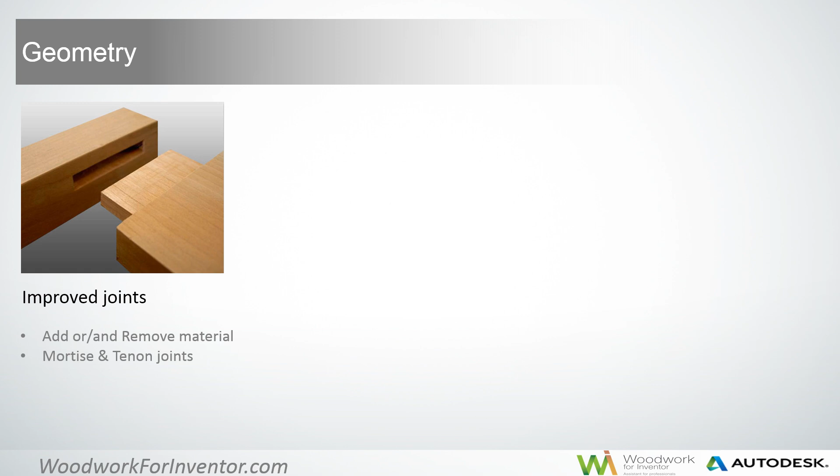So now Woodwork V5 makes you able to apply a selected type of joint to your design using the same simple way you used Woodwork before. Because now the system allows you not only to remove material but also to add material to the components, this makes you able to create joints like mortise and tenon, Chinese joints, finger joints and so on in quite a simple way.

Also, one of the new trends in design is the usage of folded plates. They may be used to cover several components, or maybe you want to just use a shared HPL layer, and so on.

Now we include such ability in Woodwork, so we have flat pattern mode supported. This means that you can unfold your folded part and apply texture direction or oversizes on the flat pattern. Also, if necessary, you may change the direction of texture in a similar way, and of course, you may control an oversize.

In many designs today, you may face sweep profiles made from solid wood, so in many cases you need to calculate the unbent length of such a profile. New Woodwork makes you able to do that. Also, in many cases you need to control oversize along each direction.

Okay, let's speak about wooden joints. As you see now, we have a sample model which contains 4 plates made from solid wood. Also, near the model we see the solid wood joint itself.

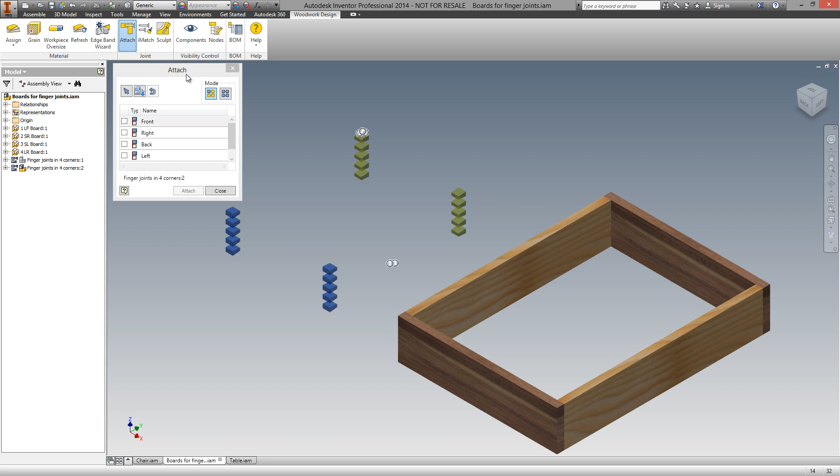Now, using the attach command, I'm able to set the right position for such joinery. It includes a similar command to the one you may see with hardware attachment. So I need to point on the front surface, on the right side, on the back, on the left side, and on the top.

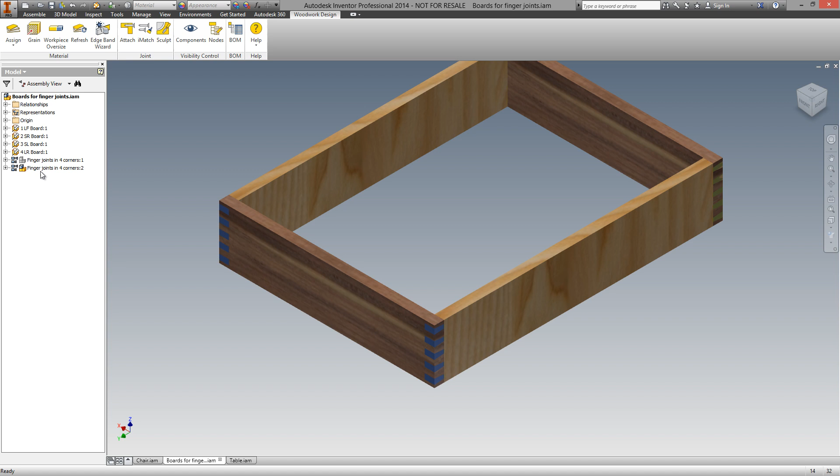Now, as you see, this joint is included in the model, but there is no joint till this moment. So all I need to do is go to the sculpt command and just run it. Now I may close it, disable visibility of this component, and as you see now we have a nice looking realistic joint here.

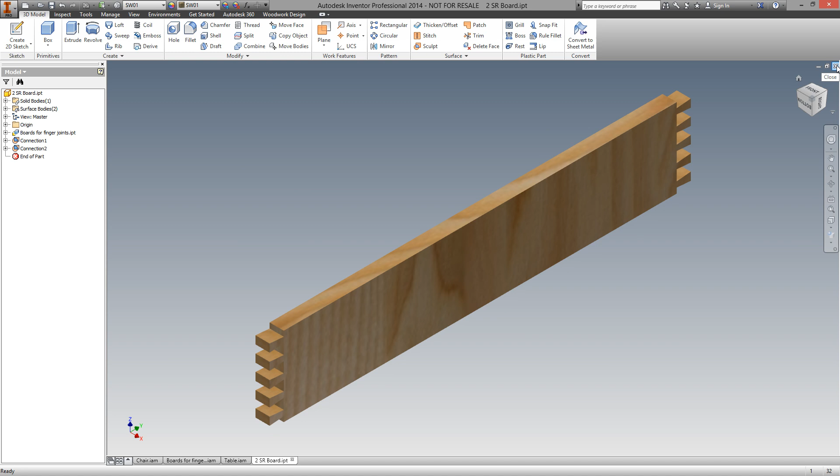You may be able to see the parts separately. As you see, we have material removed from one side and we have added material to another part. So, quite nice. Okay, and now let's see.

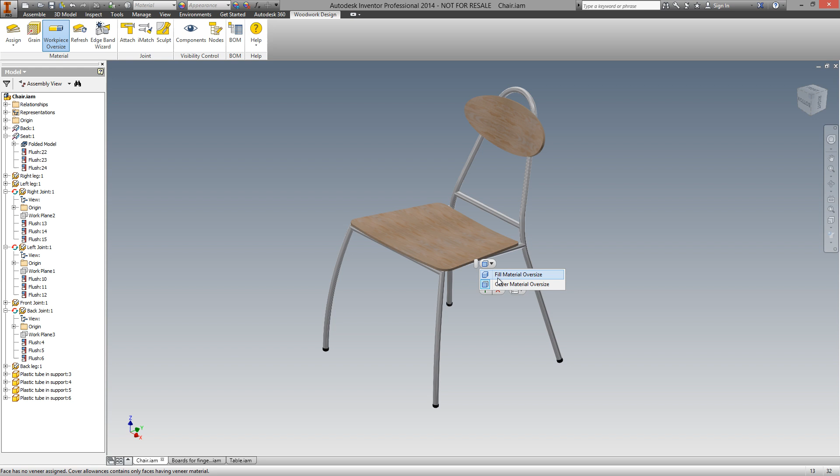Let's see how we can deal with a situation when we have some bent profiles, some folded plates, and so on, and we need to set appropriate dimension, appropriate texture orientation, and so on. So let's go there, and let's see - I need to set oversize for such a profile.

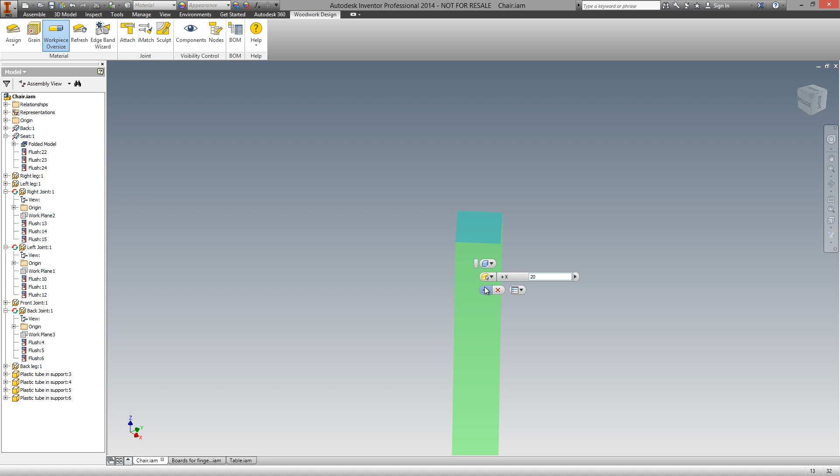The system automatically straightens this component, unbends it, and now you are able to set an oversize along each direction. So I will set a length oversize of 2 centimeters. This yellow shape represents the size of the additional oversize.

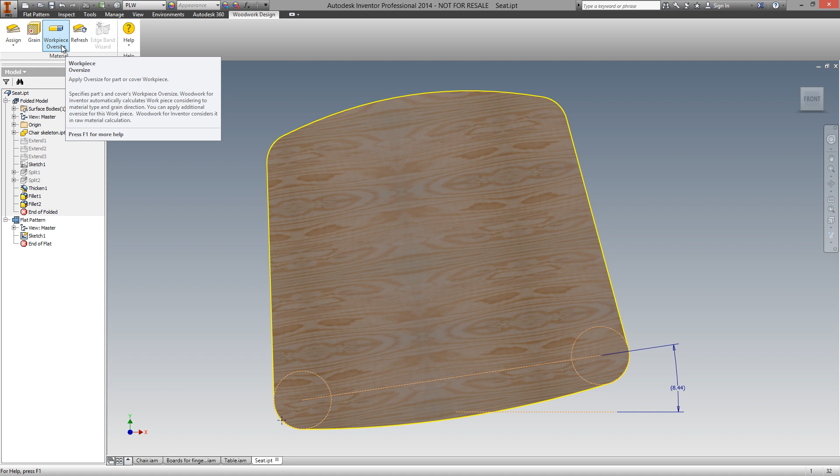Let's see what we may do with that part. This part is made in a sheet metal environment, which means that you may go into flat pattern state and set texture direction or oversize there. Because our part is rounded along the edges, we need to set some oversize to make sure that this part will be manufacturable, and set some oversize value. Okay, let's see how it will look after the oversize is set.

As you see, I added 1 centimeter along each of the sides.

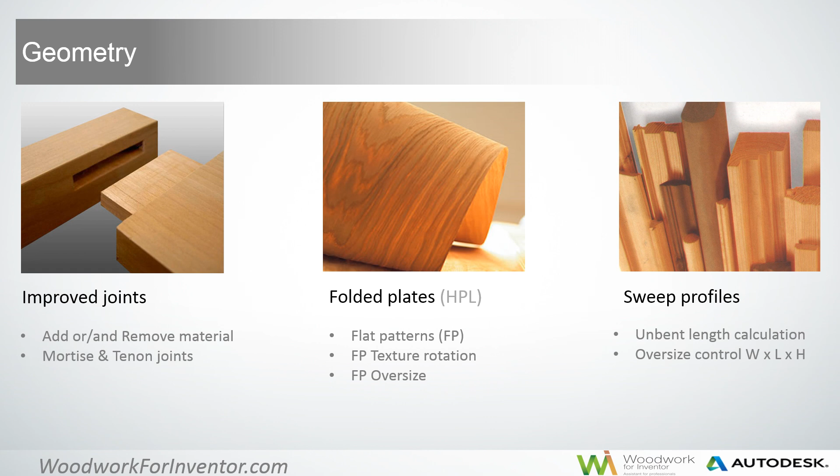Let's move to the next question, and now let's speak about material assignment. The new features allow you to separate cover layer from fill layer. This means you can independently rotate a texture direction, set an oversize, and create multi-layer boards very easily, especially if you create a laminated board in your workshop.

We also included several new types and features like paints or lacquers. We have separate sections for veneer, compensation film, HPL and so on. Because we're now working with a flexible material library, you can add a lot of materials there. There's a function that allows you to structurize materials in a way that's more comfortable for you, and we call that palettes. You can create your own palettes, including just a few materials needed for a given case.

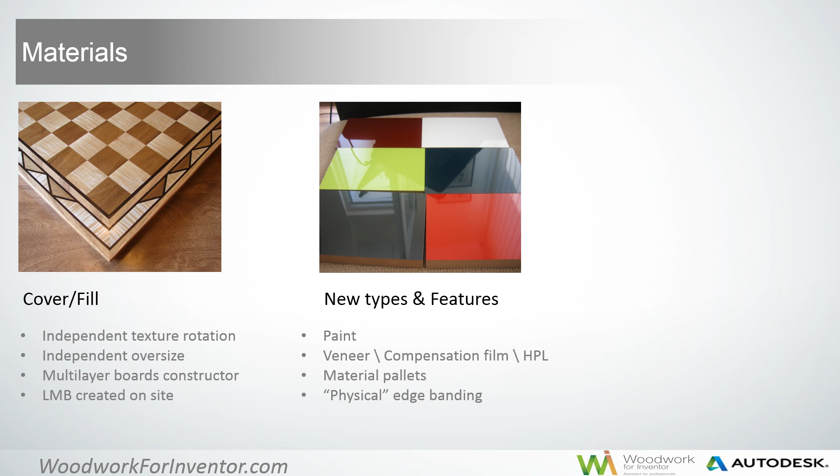Also, fulfilling the requirements of our customers, we included physical edge banding ability, meaning you can physically model edge banding in your modeling space. Speaking about materials, we made them Inventor native. This means they are photorealistic and shared with other Autodesk products like 3ds Max and Showcase. We also included an ability to rotate texture on the model, and we included physical properties like density, so you can calculate the weight of your model by setting the appropriate density value in the material.

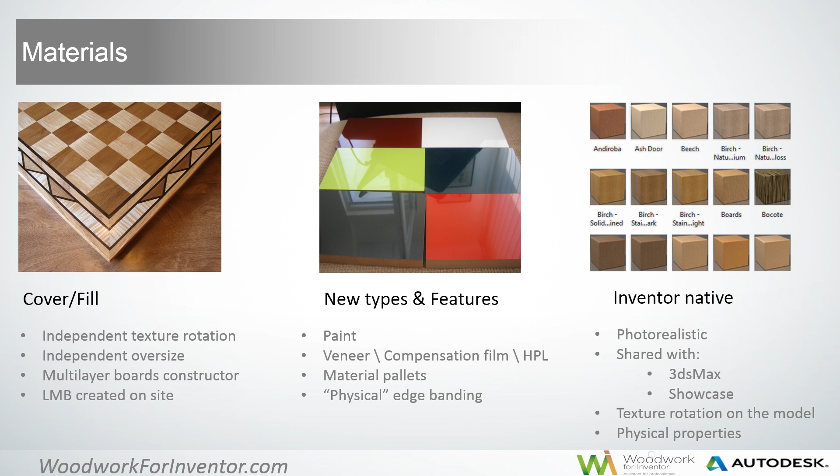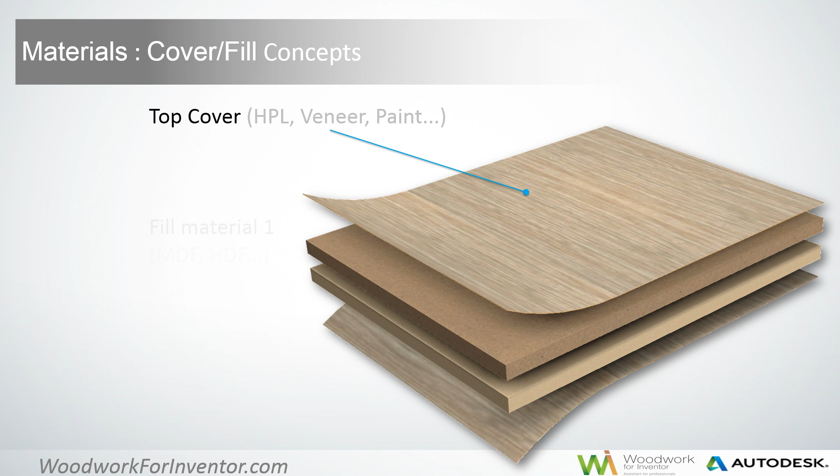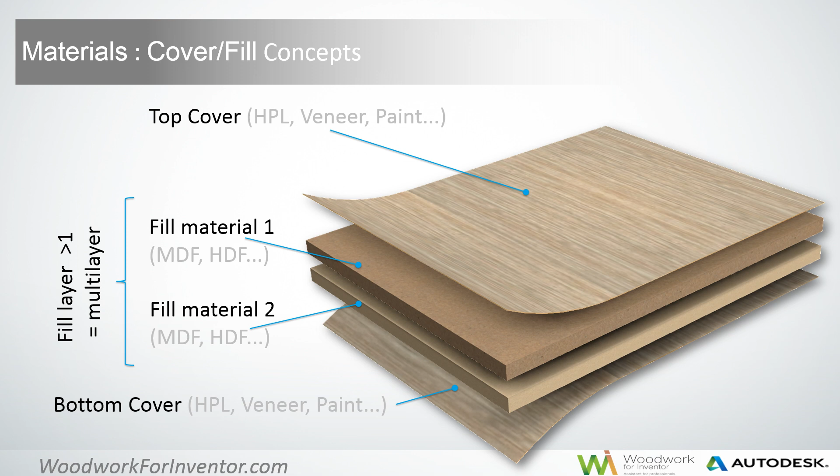Just for reference, in case you're not familiar with woodworking nuances, the board furniture is made from consists of a core material and thin cover layers. Previous versions of Woodwork treated parts as if they were made of pre-laminated board only. In the new version, we separate cover material from fill material, and both can be managed separately. This means you can set texture direction and oversize for cover and fill layers independently. Moreover, the fill layer may be glued from a few boards, meaning we may speak about a multi-layer board, which can also be designed in Woodwork.

We have such a model, and now we need to assign some materials. Let's go to the Woodwork design section, to material assignment, and set some materials. Let's start from a naked board like MDF, and I'd like to assign this MDF kind of board to the selected parts. Let's apply this selection, and let's assign some multi-layer board.

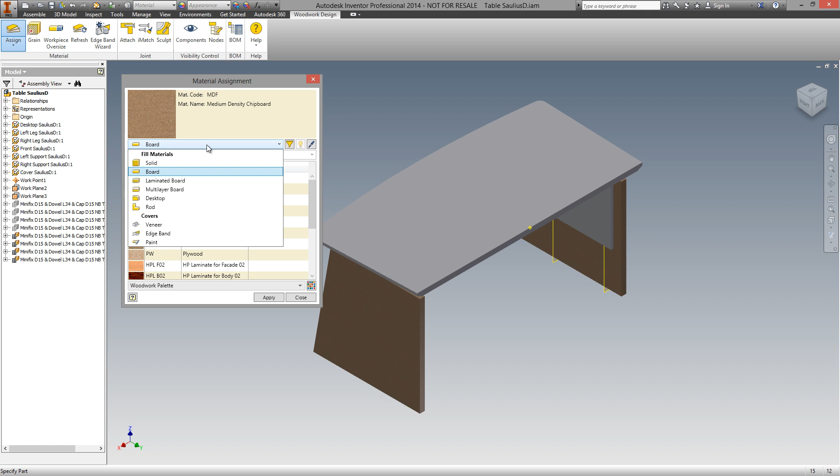I may go into the multi-layer board section, and here is a set of predefined multi-layer boards which include several layers of core material, and also two veneers on top and from the bottom. So let's assign that structure.

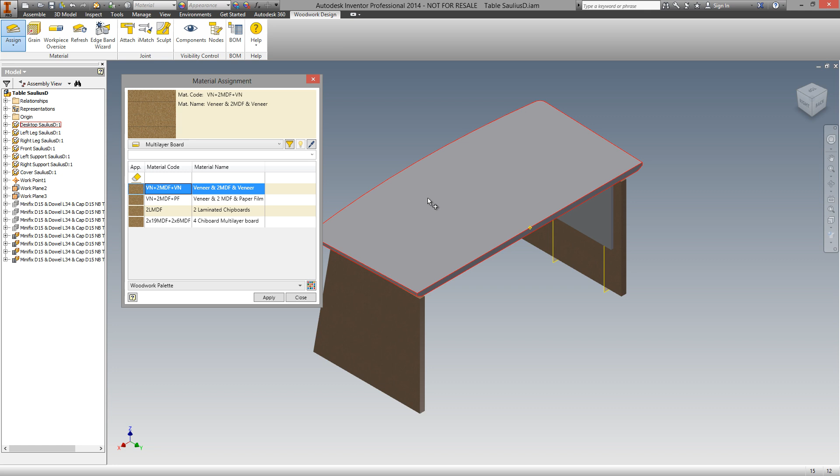If needed, you can create your own multi-layer boards and use them in the future. Now let's assign some pre-laminated board. Let's go there and set some facade material like this one.

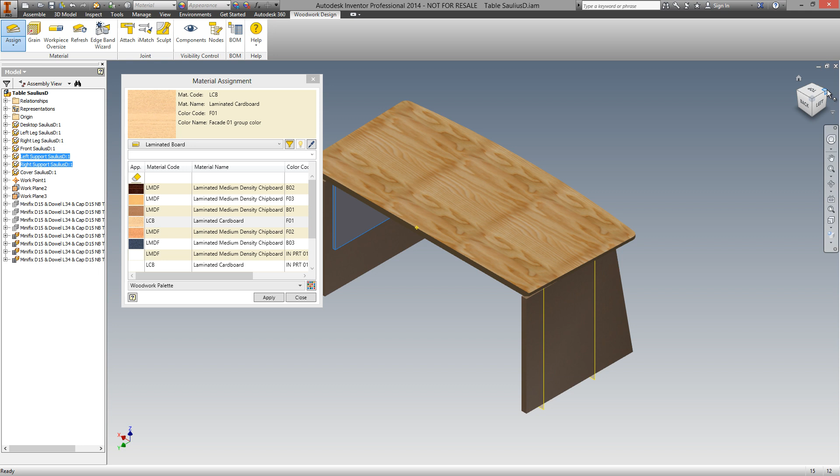Selected parts. Okay, and let's apply this material. As you see, now we have a model which contains some laminated boards like in the front, and also some naked boards that need to be covered by some veneer.

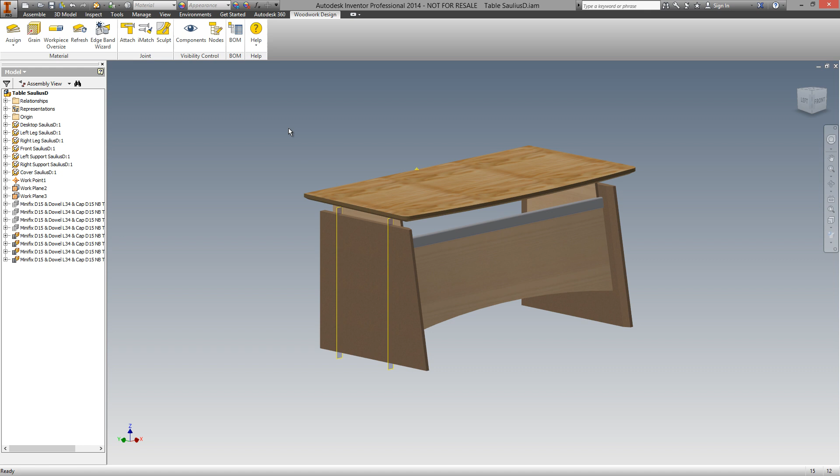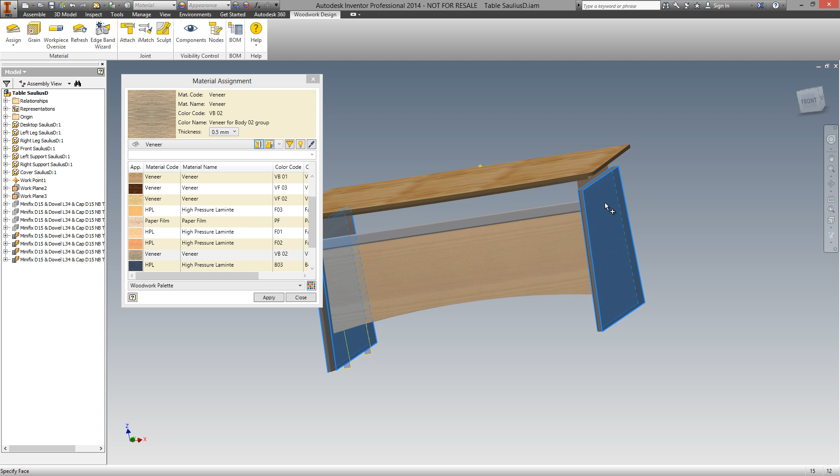Veneering may be also applied in the same way. We can go into material assignment, select the veneer type of covering, and assign some veneer to our model. All I need to do is click on the surfaces that need to be covered by veneer and apply it. Also, I may use veneer like edge banding.

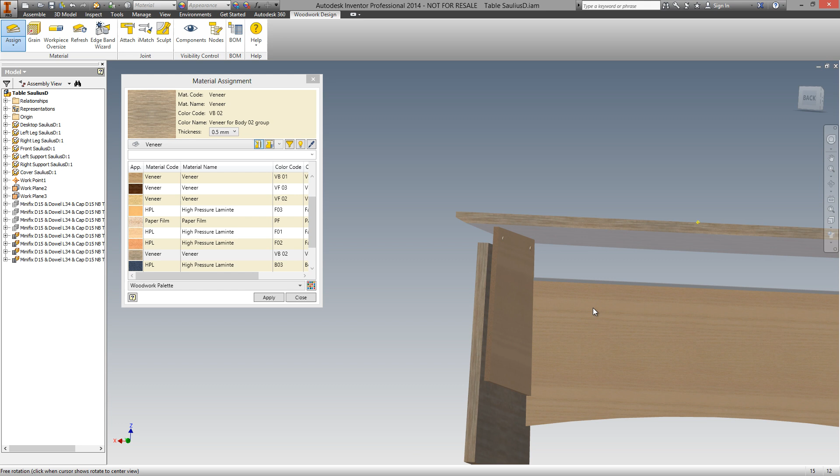All I need to do is select an edge and apply this convention. Okay, now we have edge banding on our model. Also, we may assign some rod type material, like in our case to that front timber.

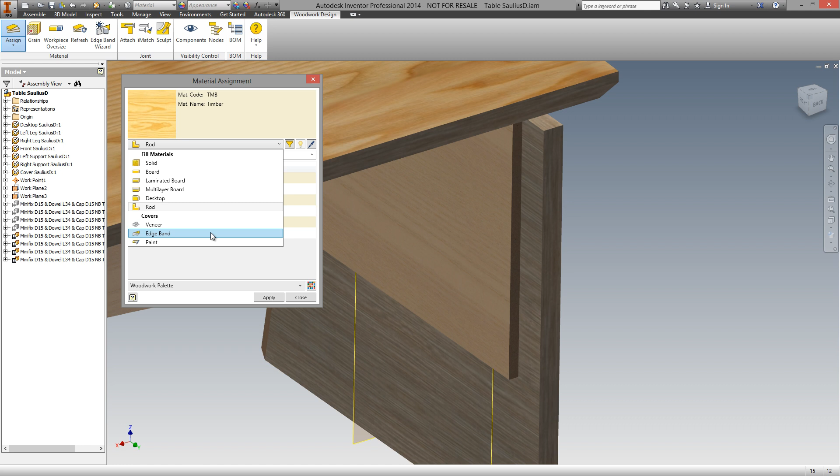Also, we have some naked edges here and we need to assign edge banding on top of it. Let's go to the edge banding command. Let's select some, let's say, PVC edge banding. Click on the edge that should be edge banded. I'll use the internal edge banding option.

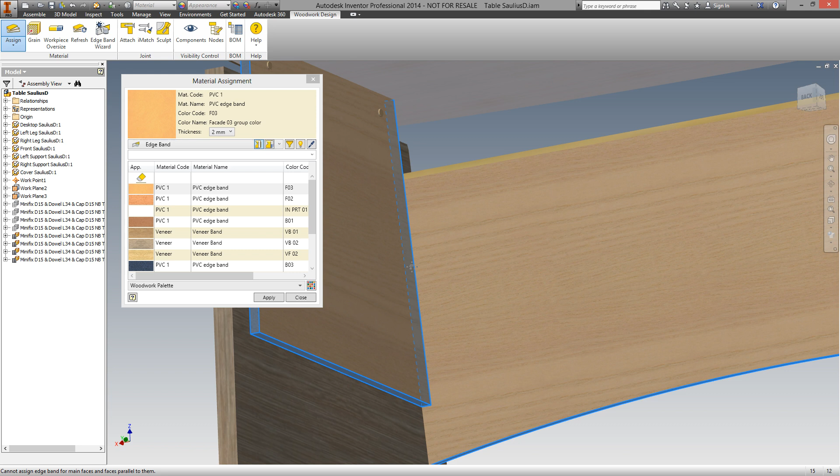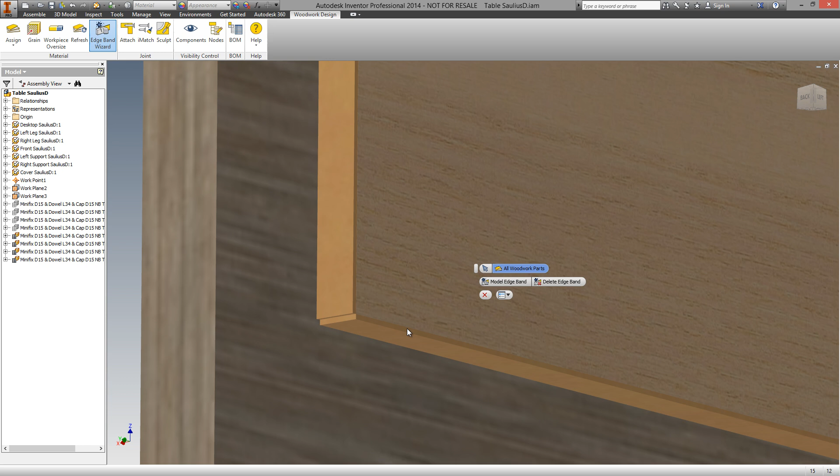So let's assign. I would like to show the new function which allows you to model an edge banding physically. Let's go to the new command called edge banding wizard, and all I need to do is ask the system to create those edge bandings. Now, as you see, we have new features here.

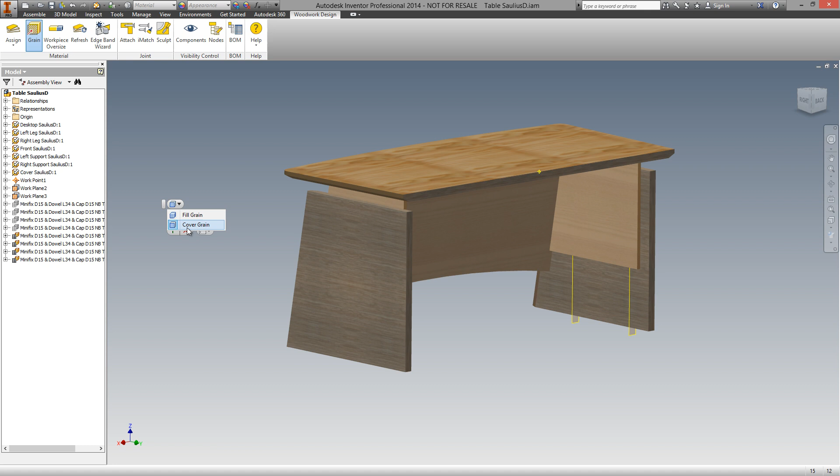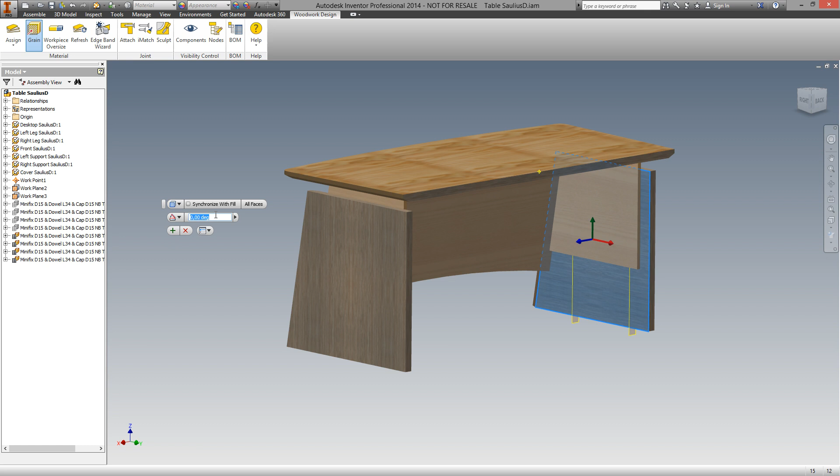Now let's set the texture direction for those veneered parts. Let's go to the grain direction, and I may set a grain direction for cover layer or fill layer. Let's switch to the cover layer, select this component, and I can interactively change the direction of the texture. Let's say I need to rotate it by 90 degrees. I'll set the angle option, enter the value, and as you see, I visually see the difference in my modeling space.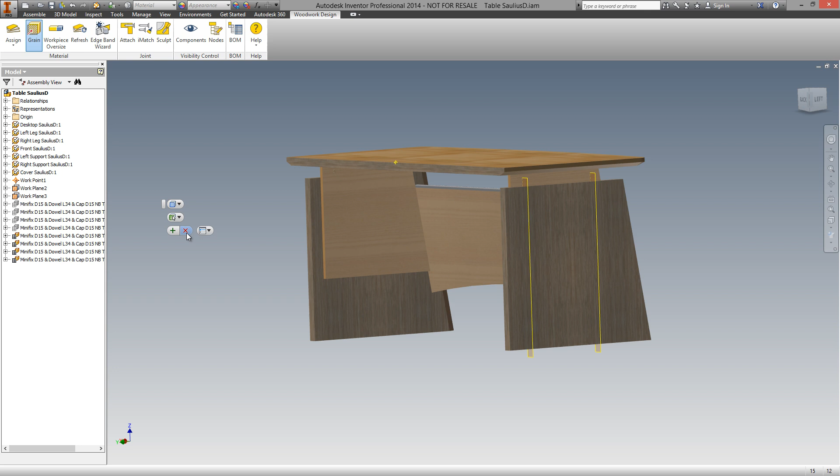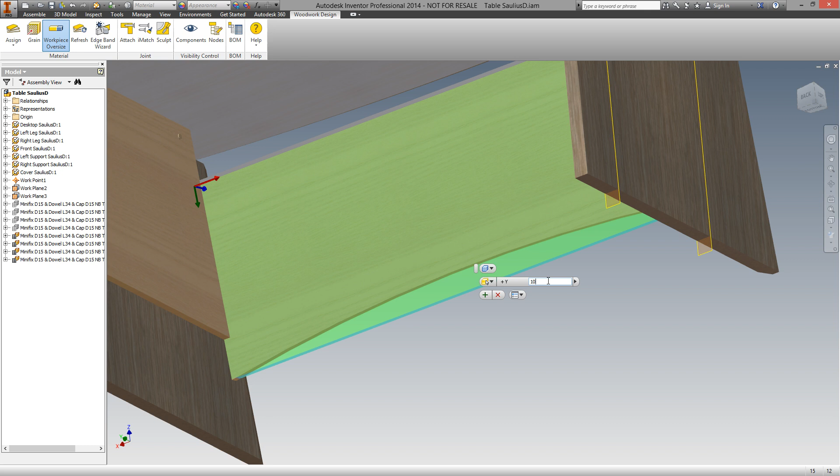Also, to make sure this part can be manufactured, I need to set some oversizes. Like in this case, when I have a banded part, I need to set an oversize. Let's go to the workpiece oversize, and I may set oversize for the fill layer, because I have one pre-laminated board without any additional layer, so I need to oversize this workpiece. Now I select which edge should be oversized, set the direction and the distance. Now it's done. As you see, operations with materials are now quite simple and more user-friendly than in the previous version.

Continuing our discussion about materials, Woodwork version 5 ensures seamless integration with other Autodesk products like Showcase and 3ds Max. Because we use a shared material library, you can easily transfer your model from Inventor to 3ds Max or Showcase without having a headache with material reassignment.

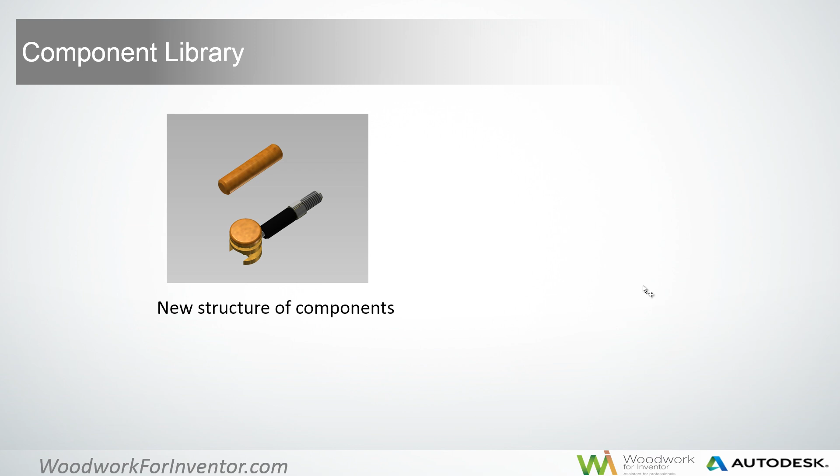Now let's speak about the components library, which is also one of the most important parts of our system. We have completely restructured how we work with furniture, because now we use iParts instead of iAssemblies, which significantly simplifies the structure of the component, making it easy to understand, modify, and manage. This also allows you to create virtual components, meaning that in the description of a part you may include items that don't need to be designed in modeling space, like glue, scotch tape, and so on. This makes management of such a library much simpler.

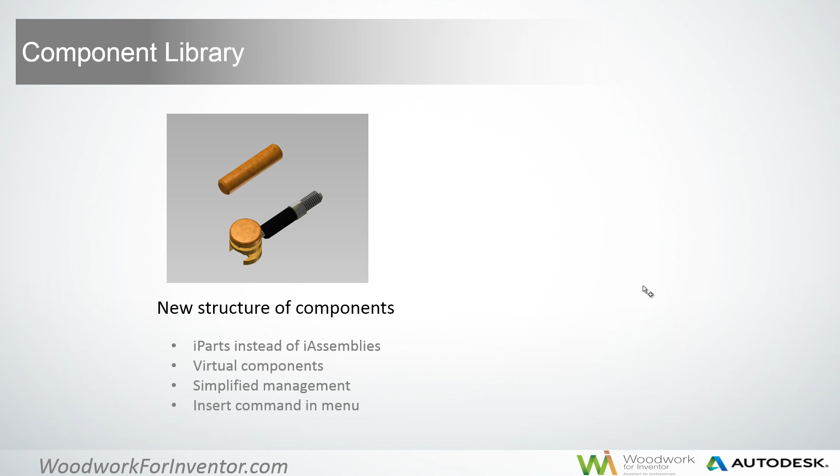We also included a new insert command in the menu. Speaking about joint templates, we also include iLogic support, adaptive joints, and so on. So let's see how it works in Inventor.

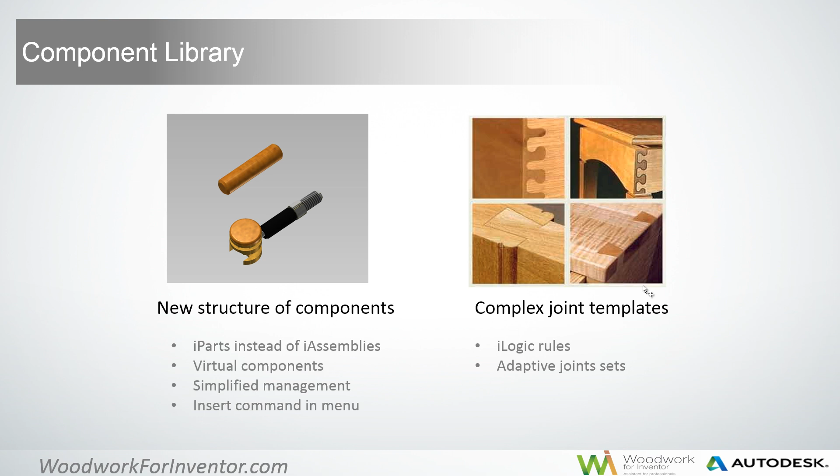We have preset some work planes here, and now I go into the attach command. As you see, there is a new option to place a component in assembly context. All I need to do is go to the library and select the type of joint I need to use—in my case, I'll use a Minifix joint, Minifix joint—and also take a look at the extension.

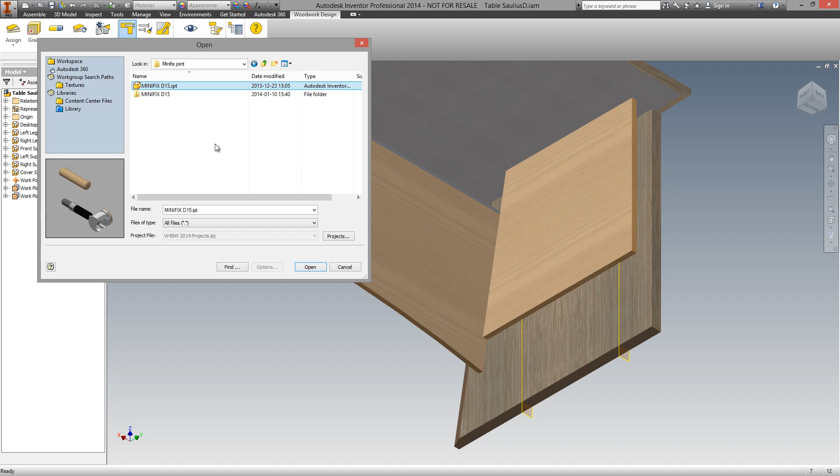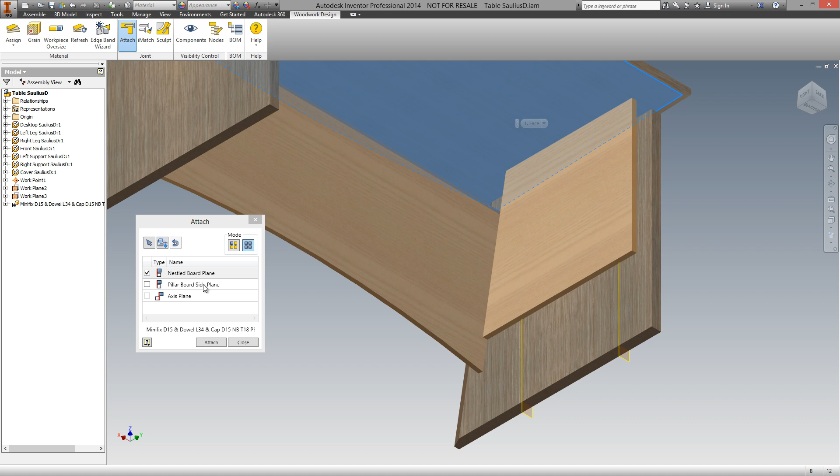I am working with a regular part, and inside this part I have a description of the component, and our system treats this part as if it were an assembly. So, as you see, I now use the standard way to attach the component. I need to select the nestled board plane, like this one, the pillar board, like this one, and I also need to select an axis. I may do this from the modeling space, or from the browser.

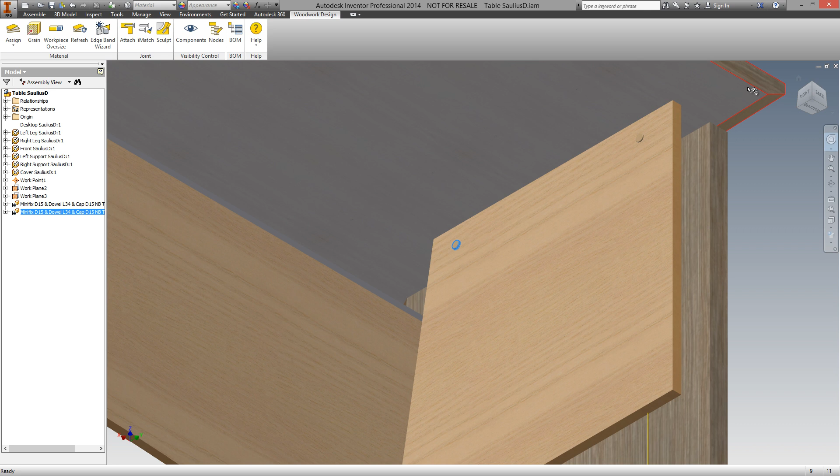Let's use the attach command, and as you see, those components are placed in their positions. If I open this component, as you see, this is a regular part. But if we return to our system and go into the specification, as you see, the system treats this part correctly—we have several components inside this part.

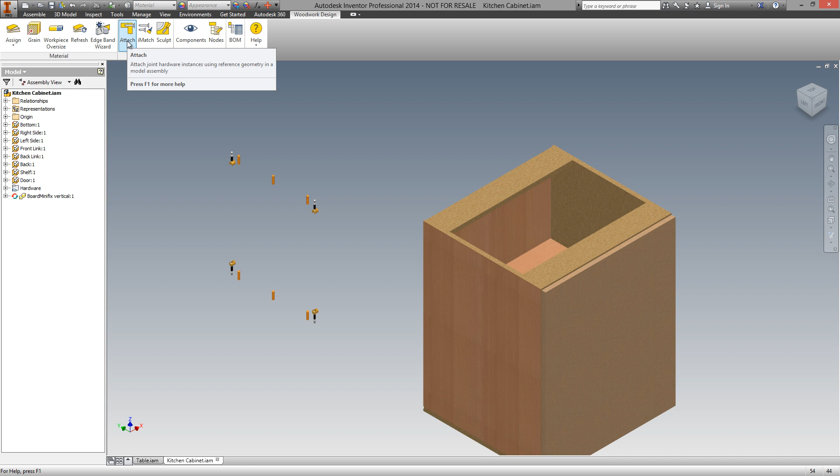Let's speak about the more complex case when I'm working with an iLogic joint like this one. What I need to do is go to the Woodwork for Inventor design ribbon, into the attach command, and use single mode. So let's select the front surface, the back surface, the top, the bottom, and the side.

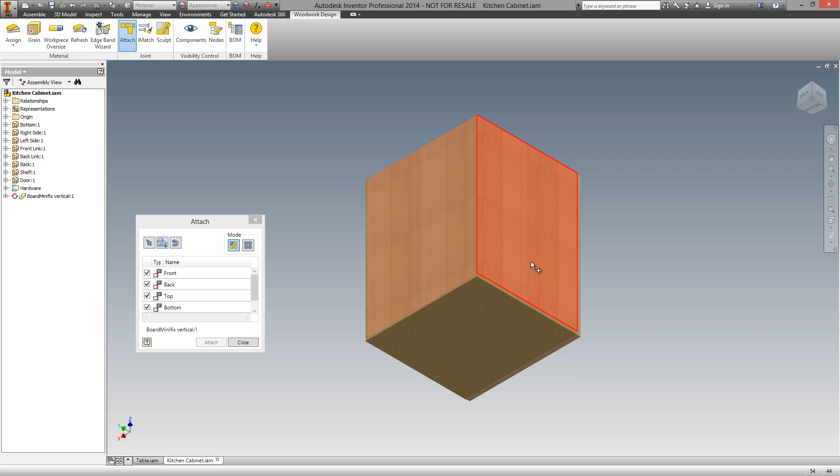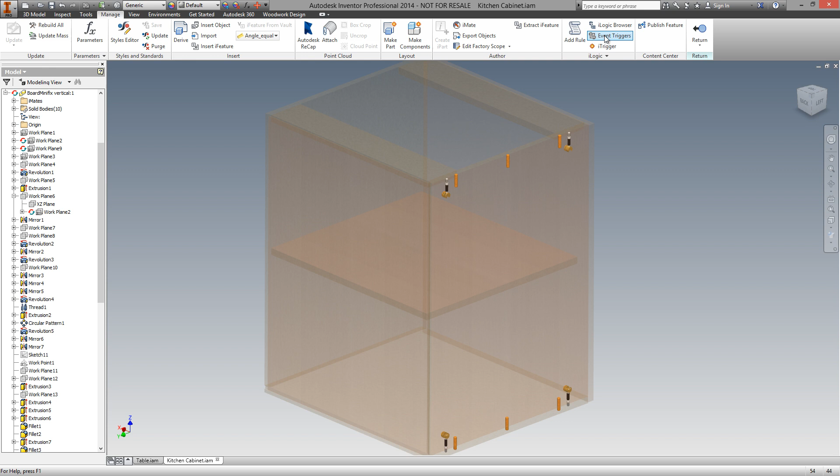Now if I go to the side panel, let's turn off this component. As you see, I have components inside it. So to manage this component, I need to switch to the component level, and from there launch the iLogic browser. Go to the manage menu, then iLogic browser, and as you see, we have a separate form which allows you to easily control the configuration of that component. For instance, for this model I don't need to use middle dowels, so I'm able to just disable them, and now I have the right configuration.

The next question is data export. We use more flexible templates, which means we may include any Autodesk Inventor property in our report.

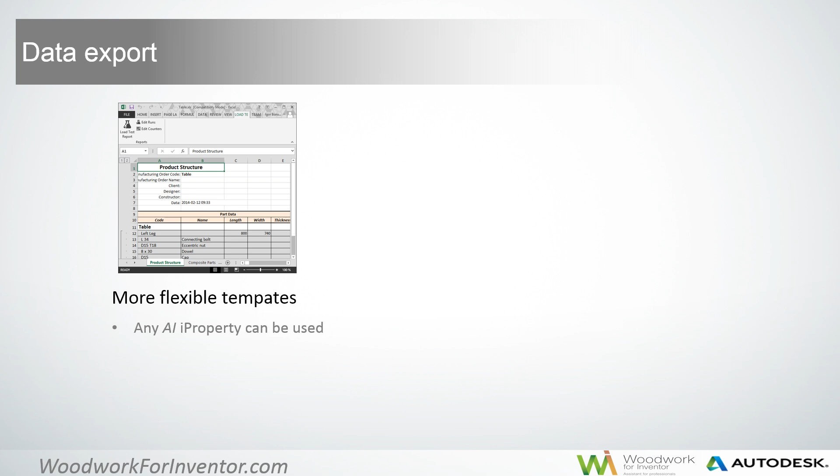We have new material replacement with illustration, and a new description of multi-layer boards. We have the ability to separate veneers, paints and so on. Also bended parts or profiles are also supported.

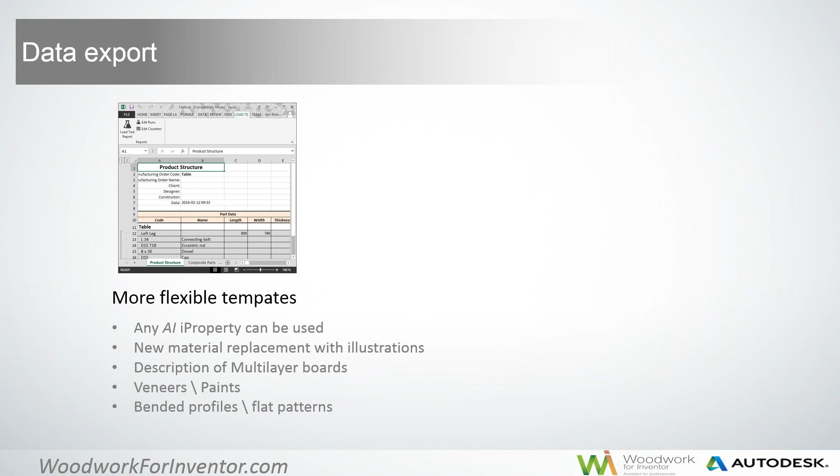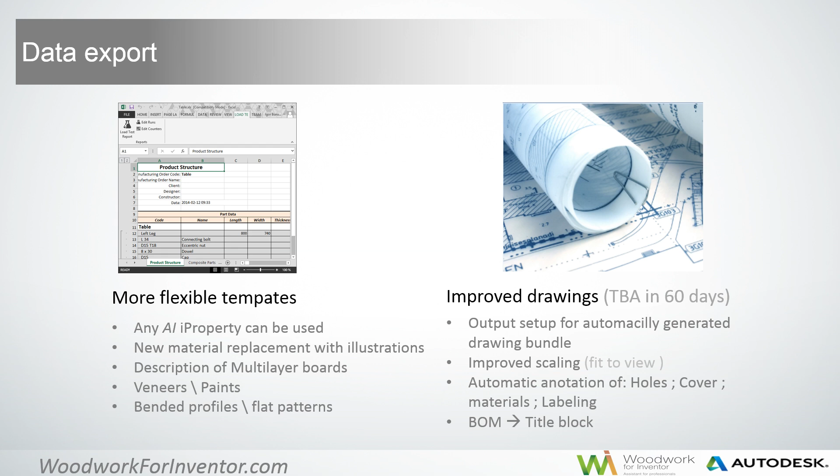Speaking about feature improvements, in 60 days we will have new features for an automated drawing generator, which allows you to output a drawing bundle in one operation. It will contain improved scaling, and automated annotation for holes and cover material. We have new labeling, with an option to place data from BOM to a title block and so on.

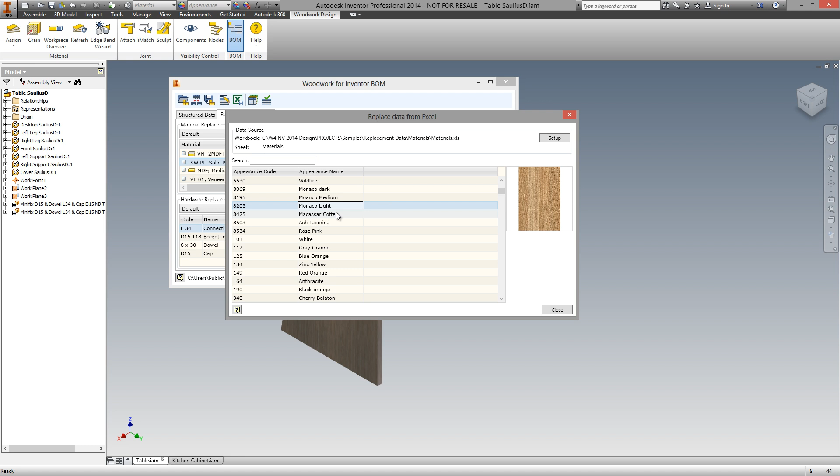Let's go to the BOM. Being there, I may go to the replace configuration, double click on it, on some line, and as you see, now we have an option to replace material with some real material, which also includes a texture. So we are sure that we have selected the right material. Okay, let's export this specification into Excel.

Now the system generates all necessary specifications with this replaced material. For convenience I just used one replacement.

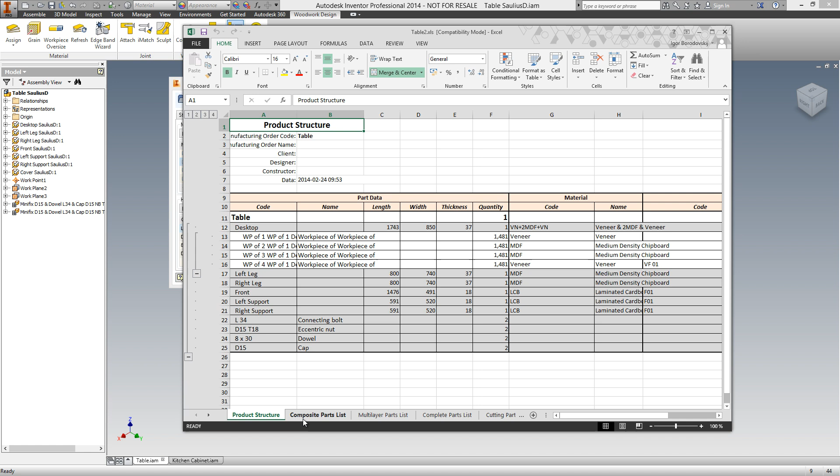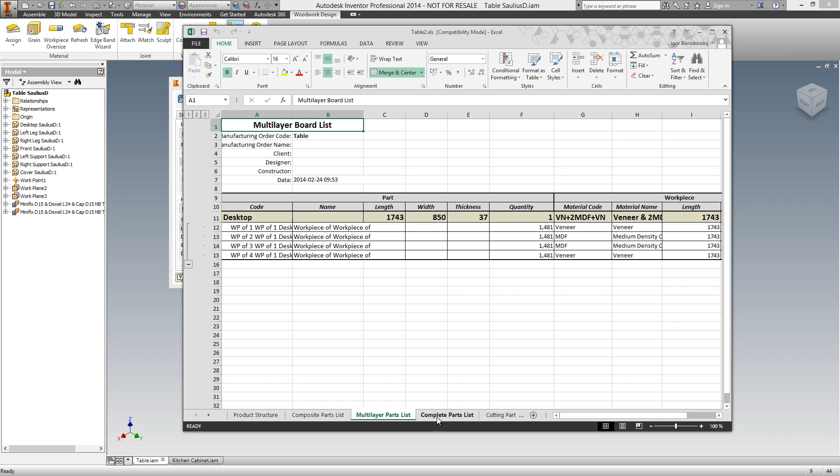Now let's go to the product structure. As you see, there is a separate tab for multi-layer boards. We have a complete part list here, and we have an option to see a cut part list, and so on.

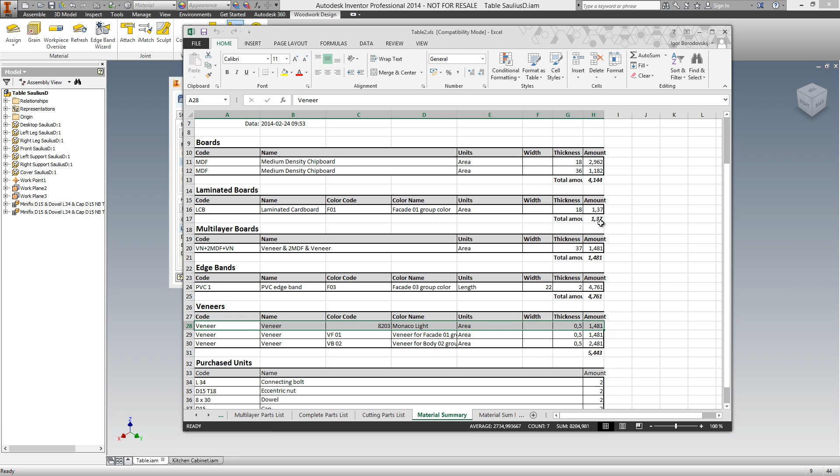And also there, as you remember, I used some replacement, and as you see, there is this replaced material. To save time, I just replaced one instance, but I hope the idea is clear.

Okay, let's close it and see what we have more. There is a lot of improvements, but due to time limitation I cannot show you all of them. Soon we will offer short trainings, so you may be able to see more nuances.

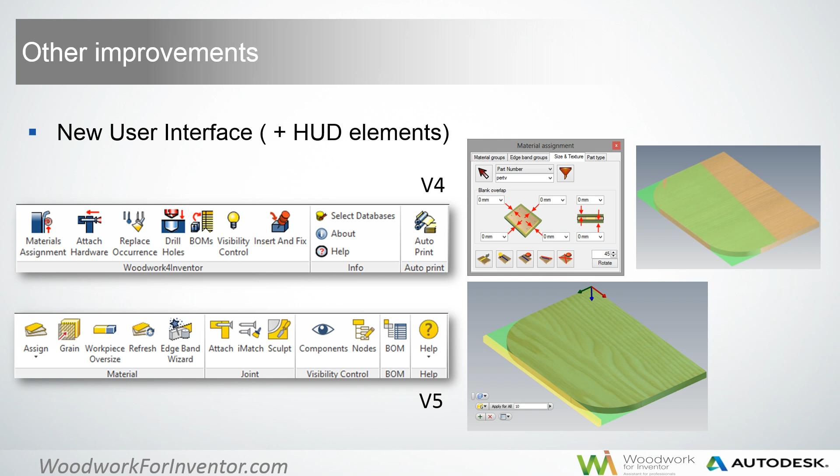Also, we included multi-language support. Now we have English, Russian, Polish, Lithuanian and German languages. This means that you may see the system in your own language.

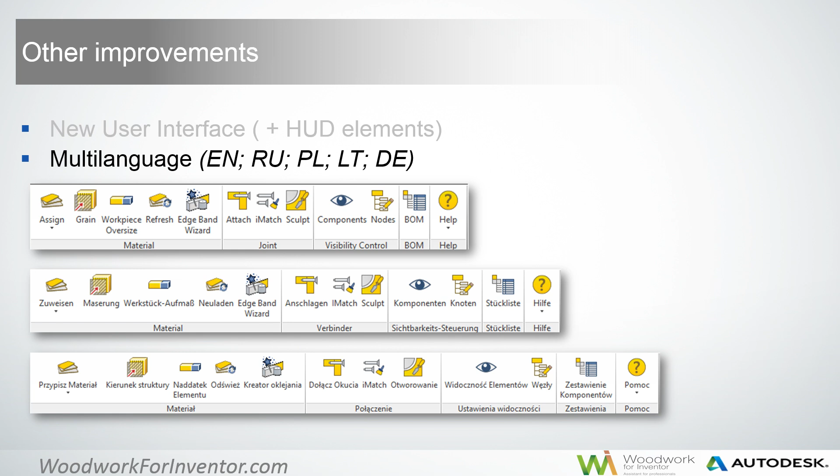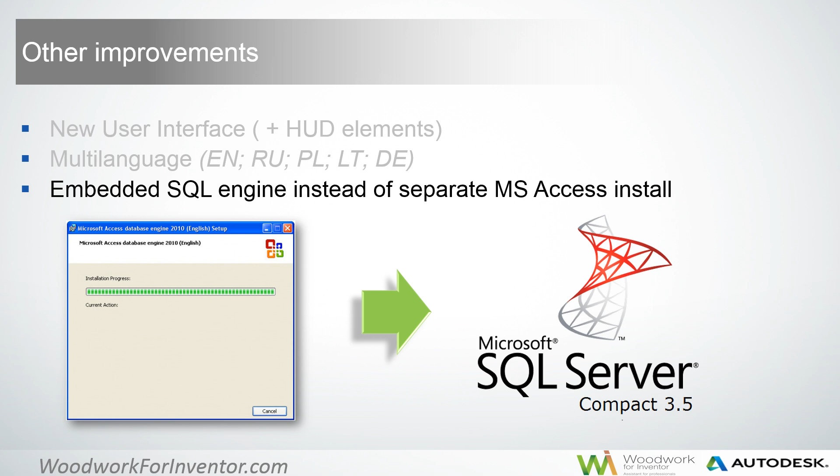Also, we embedded a new SQL engine instead of a separate Microsoft Access installation. This means there is no more headache related with the implementation process. Everything is included in one single setup file.

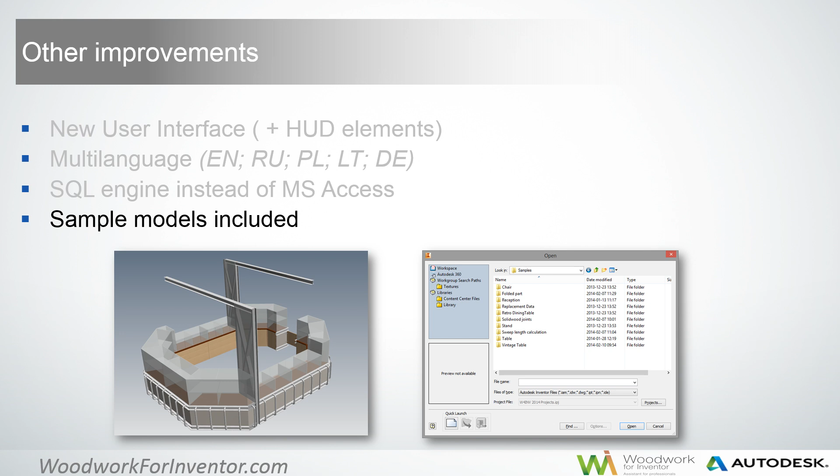Also, many of our clients requested to see some samples, and we included sample models in our setup. So after installation, you may see some samples in the sample directory in your workspace.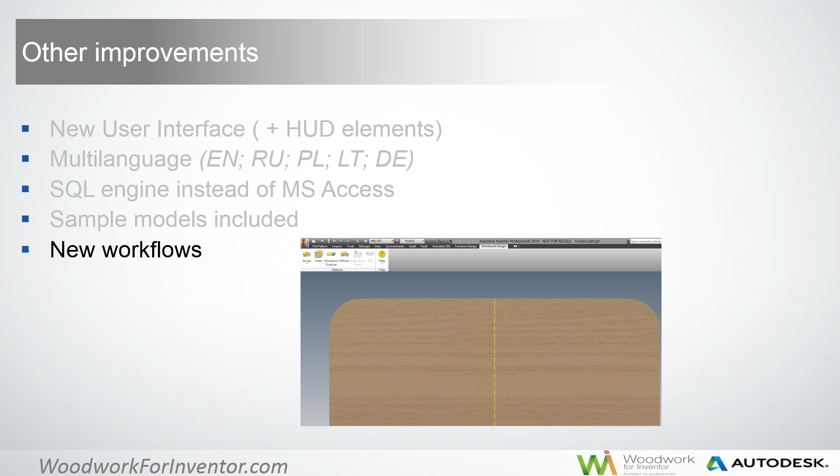And because we added some new features like working with unfolded parts and so on, we have new workflows. You may calculate the length of an unbended part, unbended profile, set the grain direction on a bended plate, set oversize in an unbended state, and so on.

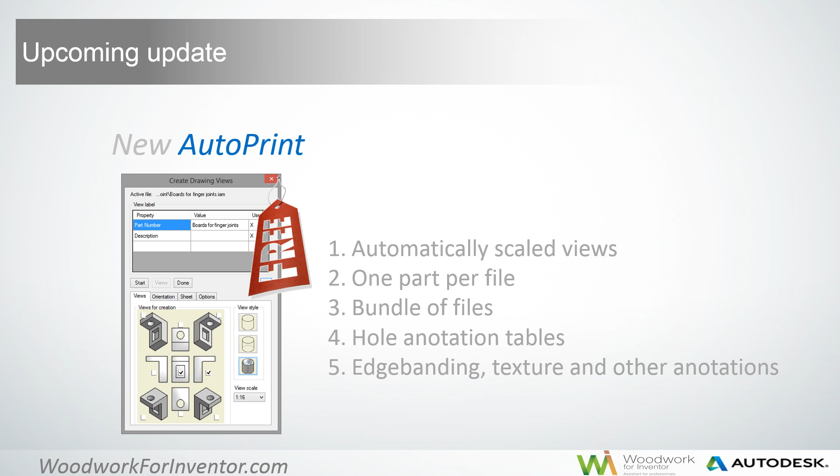Moreover, there is a new upcoming update, which will be available I believe in April, and we will include a new AutoPrint. This update will be free, and you will see new options like automated scaled view. There will be an option to set one part per file, so you may get a bundle of files in a selected directory. There will be a new hole annotation table option, with annotation for edge banding, texture, and so on. Plus, we will include two new languages, French and Italian.